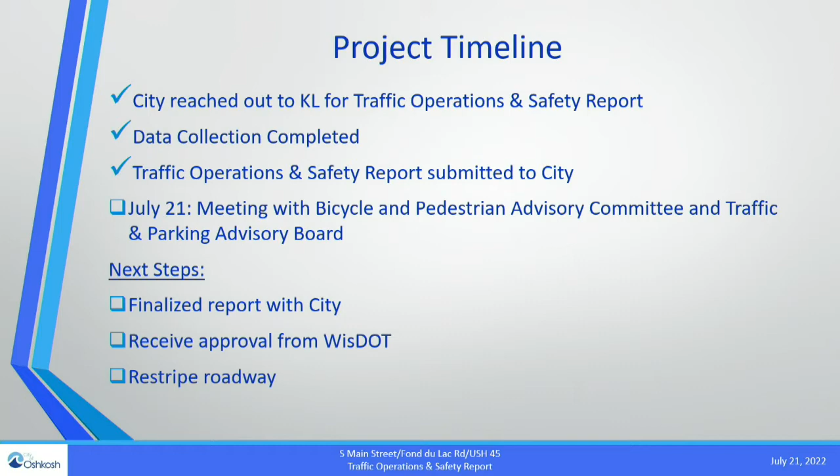As Jim mentioned, this is connecting highways, so it's a city street, but they have a level of jurisdiction because it's Highway 45. With their blessing, we're anticipating they'll be favorable. They did approve something very similar just to the north. And this type of roadway improvement is something that DOT does frequently throughout the state. So their approval gives you the opportunity to then restripe the roadway as this report suggests, or in some other variation of it, but essentially a road diet, taking it from 4 to 2 lanes with turn lanes.

So I'll be brief, a bit more on the background of the study we did. It's a traffic and safety study, so we look at both how well traffic flows, but also the safety characteristics, how things work now versus how these changes might affect that. We're looking at getting traffic counts, turning movements at intersections, overall traffic flow during the day, and then translating that into different ways to stripe the roadway, different lane configurations,

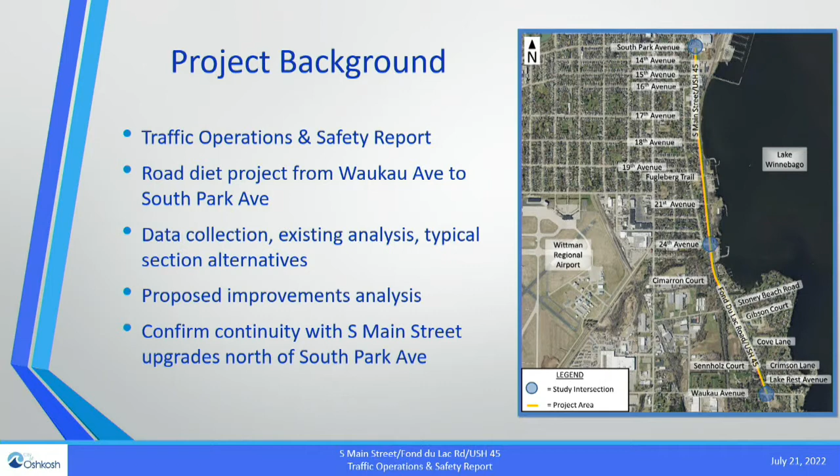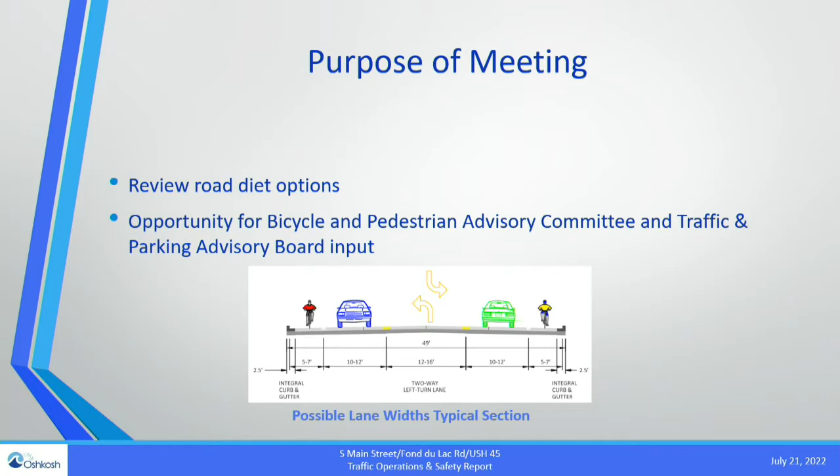looking at it from a continuity standpoint too, because the road to the south is a rural 2-lane section, then it transitions into the most recently converted section to the north. It's got some turn lanes. We're looking at a little bit different cross section in this piece, but understanding the continuity of the whole section of Main Street in this area. So again, the purpose of the meeting is to review the road diet options and performance metrics that our study found, and really looking for input and questions from this group.

So with that, Jamie, take us through the rest of the presentation. And again, if there's questions, please feel free to shout those out. We'll do our best to answer those as we go. Just real quick, to clarify, the scope is only between Waukau and South Park, not coming up to the river? Correct. That's correct. Yeah, we restriped that with the project last year. We restriped from 8th to South Park, so that part's already done with 1 lane in each direction.

It's a little different in that section because the goal, and Mark can jump in as well, the goal for that section was to add parking for the Sawdust District. Yeah, Sawdust District. If you recall, in the Sawdust District plan, we had the current roadway configuration, the intermediate plan of getting parking added to help businesses, and the long-range plan of that section being completely reconstructed. In the 28 to 30 range, we're using the connecting highway funds; I believe James submitted the application and got approved. Now we just find out where we end up in the funding for that. So that section, we already did the restriping, added parking on site, one travel lane in each direction.

And then ultimately, when we achieve the wider right-of-way in 28 to 30, it'll be completely rebuilt, more similar to what you see in front of the arena. This request that came in was specific to the southern part. Okay. And KL had to do a little bit of work with us on the restriping of the northern section because we had to do some light timings and stuff for WisDOT, all because of the connecting highway.

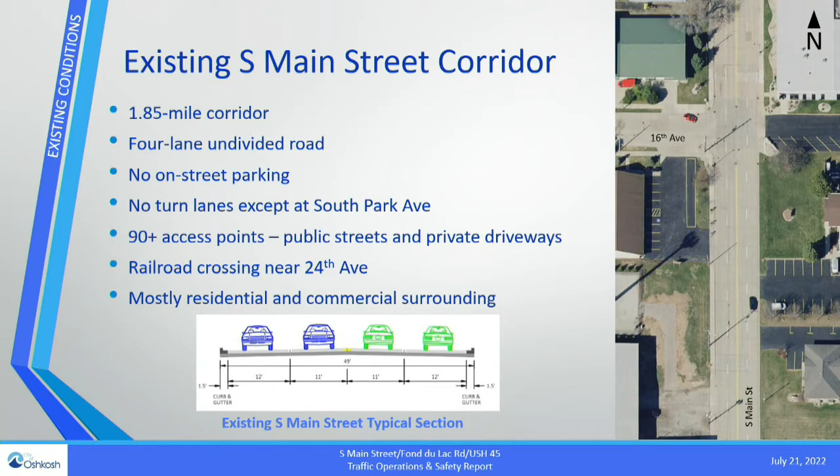So the first thing we did was we collected traffic counts in February of this past year. We focused specifically on the morning and afternoon peak periods during the weekdays, and we looked at our existing 2022, and then we looked at 20 years in the future with the forecasted volumes that WisDOT provided to us. We wanted to make sure that whatever we're recommending will work in the future, not just for right now. And the forecast estimated kind of minimal growth since this area is pretty built out already.

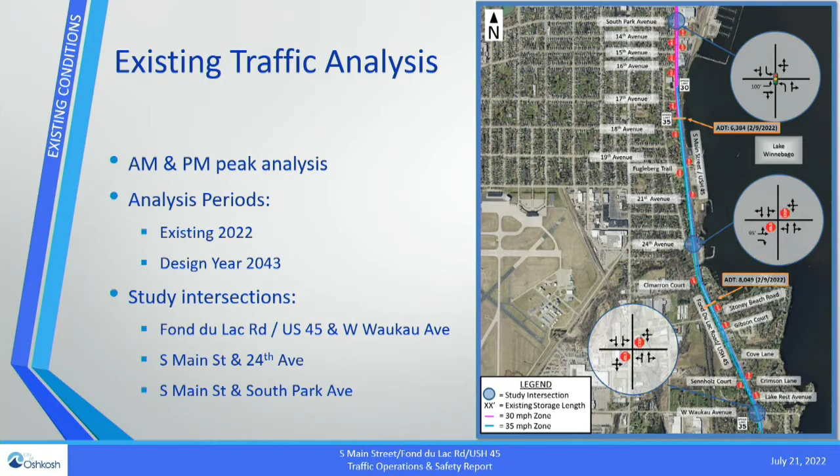We kind of zoned in on 3 main study intersections with Waukau Avenue to the south, 24th Avenue a little bit to the north, and then all the way up at South Park Avenue. And these 3 intersections just had a little bit more traffic volumes. They're more connected to the other main streets that go through the city. So we identified those as being a little bit more, we wanted to focus in on them a little bit more, right?

After that, we looked at our existing crashes. We pulled crashes from WisDOT from 2016 to 2020, as that was the most recent completed year that was available. And there were 58 reported crashes in that 5-year span. Of those 58, we found that 39% of the crashes were angle crashes, and they're mostly from cars turning from the minor street out into South Main Street and crashing into somebody on South Main Street. So that is one of the main problems with having a 4-lane undivided, is making sure that vehicles are clear in all 4 lanes.

We also found that 24% of the crashes were rear-end crashes at intersections, and with the lack of left turn lanes, we found that if somebody's slowing down in the left lane to turn left, if there's somebody who's distracted or moving a little bit too fast, then that can cause a rear end. We also found that 37% of all of the crashes had injuries, so they ranged from very minor injuries to a little bit more severe, but they're all definitely something to take into account.

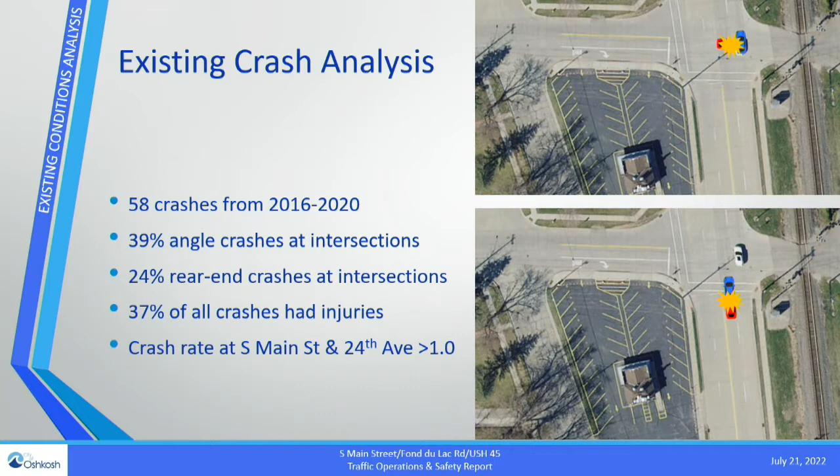And then we calculated the crash rate at South Main Street and 24th Avenue, and we found that the crash rate was greater than one crash per million entering vehicles, correct? And that just sets off a little bit of a red flag to us and WisDOT, so we wanted to make sure that we address that and some of our safety concerns that we've heard from before.

So we analyzed the whole corridor using some software and observations, and we found that South Main Street is operating well under our capacity limits. The average daily traffic is about 8,000 vehicles per day, which is well within the bounds of a 4-lane highway, even a 2-lane roadway. That's pretty well under capacity for that. So we're operating at a level of service A, we found, currently and in our 20-year look ahead, and that is extremely acceptable, almost free flow down South Main Street.

Oh, that went forward. Sorry.

And then we found that all of our side streets were operating at a level of service C or better, which is tolerable, not extremely long delays or queues that we found.

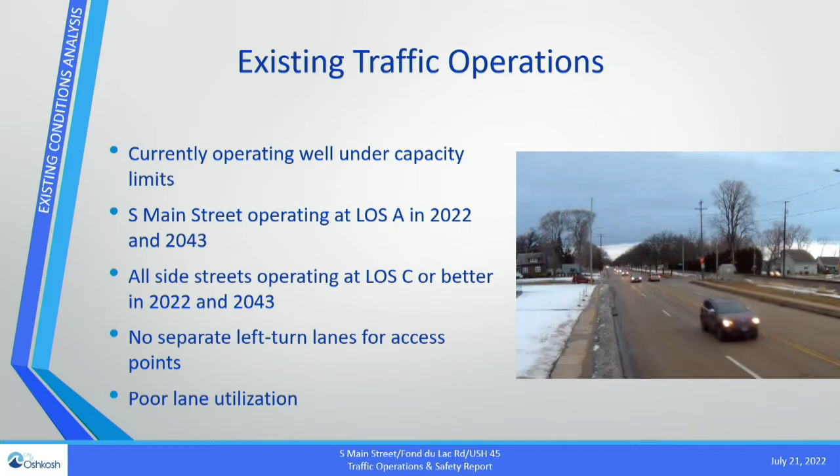We did mention before, so there's no separate left turn lanes for our access points going onto South Main Street or on South Main Street, which can lead to some pretty poor lane utilization with cars that are turning left or right. So you can see in this screenshot on the screen that the left lane moving southbound, pretty much all of the vehicles traveling south are in that left lane. So it did kind of hop between the right lane and the left lane that we noticed, but in general, most of the vehicles are in one lane or the other at the same time.

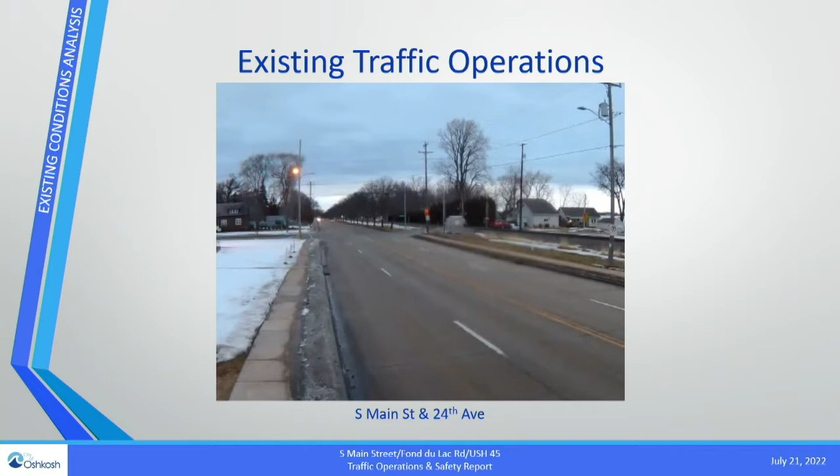So after we looked at all of that, we went back to what the city wanted for their goals and objectives of this corridor, and we wanted to make sure that we were maintaining or increasing the efficiency of movement through South Main Street, through that whole corridor. We wanted to maintain or increase our operations through the side roads as well. We obviously want to increase safety as much as we can on South Main Street and our side streets.

Maintaining access to all of those 90+ access points was also a big factor in our decisions, and we wanted to increase our multimodal facilities, so accommodating bicycles, pedestrians a little bit better, and we wanted to do this all within our existing curb and gutter. So we're not talking about reconstructing, tearing up the road, mostly just repainting that corridor.

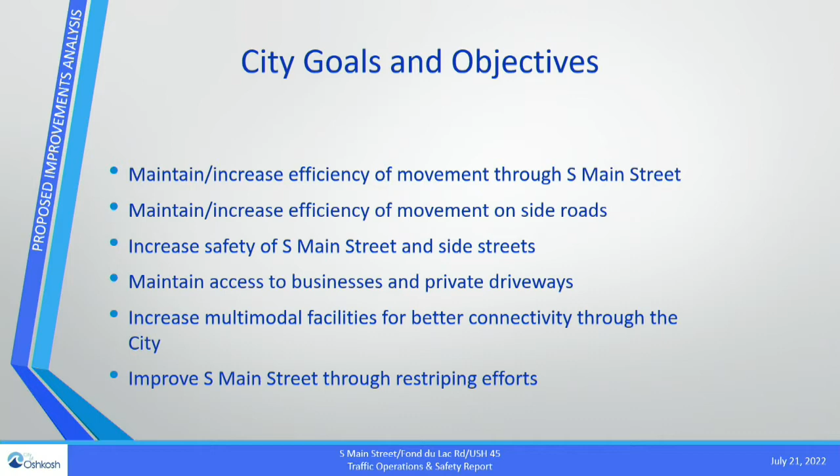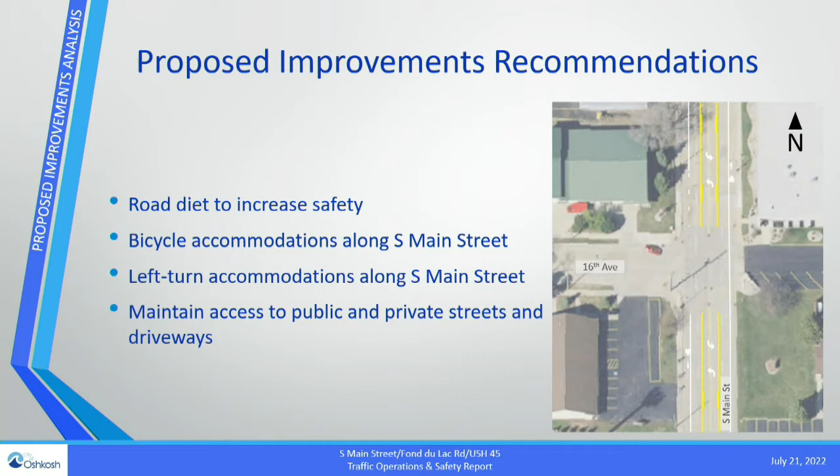So with all of those goals and objectives in mind, we came up with some recommendations for what we can do with the corridor. We looked at specifically allowing for left turns off of South Main Street a little bit safer and a little bit easier. And we looked at including some bicycle accommodations along South Main Street, and again, maintaining access to all of our access points. Which leads us to a road diet, and this can increase safety, and it essentially narrows the roadway down from 2 travel lanes down to 1, and introduces that 2-way left turn lane or left turn lanes, and then that gives room for bicycle lanes as well on the street.

So we looked at exclusive left turn lanes for all of our access points, because this is a little bit more rural than that segment to the north of South Park. We decided that maybe a 2-way left turn lane would be more efficient to help with all of those smaller access points that people don't turn into and out of as often, but still need that extra space to be able to turn into and out of.

So incorporating this would involve reducing the number of through lanes from 2 to 1 in each direction, and this 2-way left turn lane or TWLTL would allow for a continuous left turn lane so that you can turn into all of those smaller access points and side streets along the whole corridor. One of the main benefits of this is that it reduces the number of conflict points we have, as cars that are turning from the side streets only have 3 lanes of traffic to travel across instead of 4 now, which can help reduce those angle crashes.

And then we also looked closer to 24th Avenue, where we had a little bit of a higher crash rate, and we would recommend that we provide exclusive left turn lanes there. So converting that TWLTL into exclusive left turn lanes just at that intersection, and then expanding it back to a TWLTL on either side.

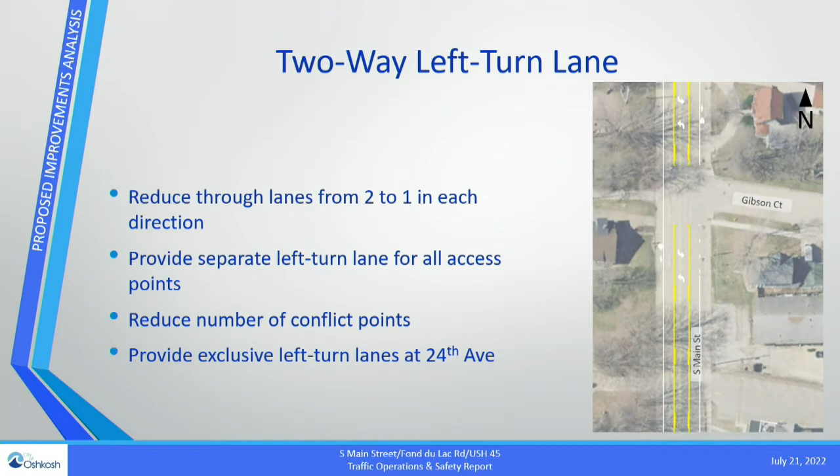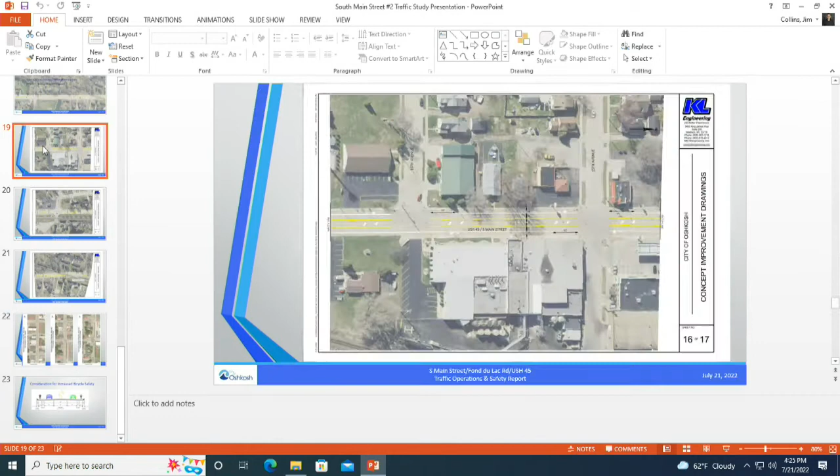I'm sorry, is there an image to show, if you go back, that transition from the dedicated or exclusive left turn lanes to the TWLTL? Yeah, I actually have that in here. I think I did put that in later in the slideshow too. Oh, okay. Should I go to it real quick? Yeah, if you want to jump to that. Also, if you have one of these packets, that shows that intersection as well. The reason I ask, Jim, as you know, over on Oshkosh Avenue, it kind of has that dedicated left, then straight, then dedicated left.

There's a lot of confusion over there. Is that what they're describing here? Which area? Over on Oshkosh Avenue, right around Arboretum and Algoma, where for a few hundred feet there's dedicated right, and then it goes to straight only, then it's dedicated left and straight. Do you know what I'm saying? Yeah, that kind of leapfrog. No, that wouldn't be. Okay. To be different than that.

Basically, here they're only talking about the dedicated left turn lanes at the intersection. So if you look here, this is 24th Avenue, north is facing to the right. So we would have a two-way left turn lane up until we're within 100, 200 feet of the intersection. And then we would recommend adding a double yellow line here to close off the twiddle, and then you would have that left turn lane forming, and then cars can turn into and out of. And it would be very similar just to the south of that. So this is more like Murdock, or even like Jackson.

To that point that the mayor makes, I'm looking at the house that's on the west of that intersection, on what would be the north. This one right here? That one right there. Is that person not then unable to get to their home from the south? Well, with the turn lane length, that's not set in stone or anything. There's some flexibility. The important thing in our minds was this is a more prominent intersection. The turning movements are more significant. Well, I get it, but I'm just trying to play devil's advocate here, because if that was my house, I'd be a little less than happy.

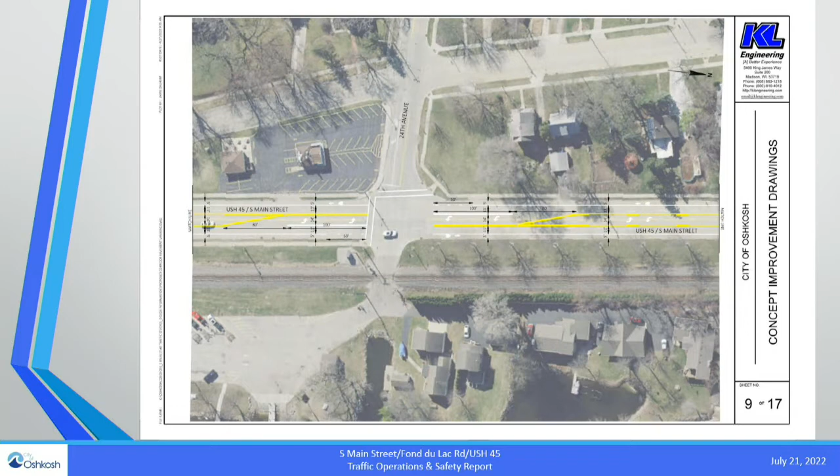Can you zoom in on that? Does that drive go between the two houses? Like, is that a garage there coming off South Main? Like, if we go up now to the west here? No, it doesn't go all the way through, so that's their only driveway access, is that right, to that second house there? Yeah, it would appear so, I believe. It looks like that, yeah.

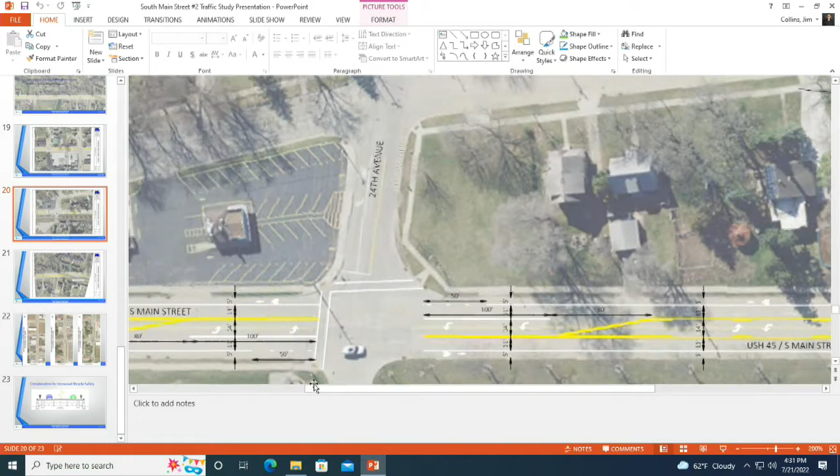All right, thank you. I guess, while we're talking, if you pan to the left a little bit, Jim, the commercial property, that's the drive-in. Their driveway is probably in a location where, as cars stack up, they may restrict that to more of a right turns only type of driveway. They do have access off of 24th though as well. This is also the intersection that had the concerning crash history, right? Yes. Correct.

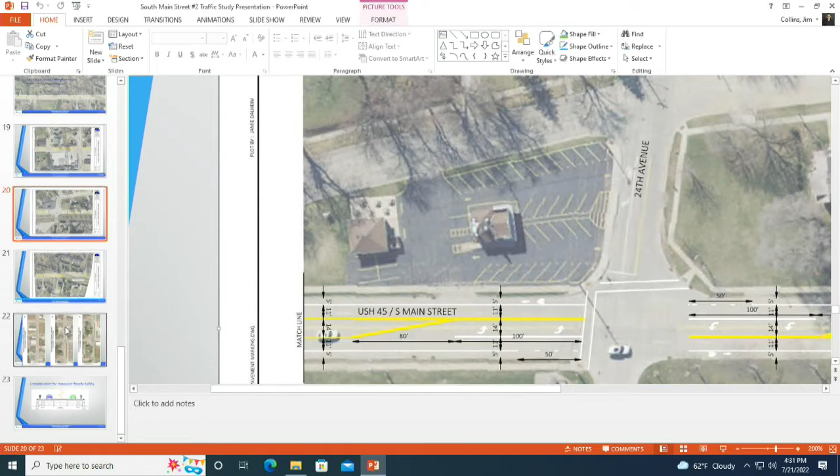So these two screenshots are what we found based on WisDOT guidelines and then what we ultimately would recommend for our typical section. That top screenshot is a typical section with acceptable lane widths. So we can have a bike lane of anywhere between 4 and 7 feet, a travel lane between 10 and 12, and the TWLTL can be between 12 and 16 feet.

And just playing around with those widths and maintaining continuity with the section to the north and typical widths that we see, we are recommending that bottom screenshot with 5-foot bike lane width, 11-foot travel lanes, which is what we have to the north there, and a 14-foot TWLTL. And that'll fit perfectly within that curb and gutter line. 14 feet is pretty typical, 5 feet bike lane is pretty typical.

Maybe just briefly, we also talked to Jim and considered buffered bike lanes. I don't know if that's a familiar topic, but basically a narrower bike lane and potentially a narrower travel lane, making up for that space with a double white line. We stepped away from that with this being fairly conventional and effective, in our opinion.

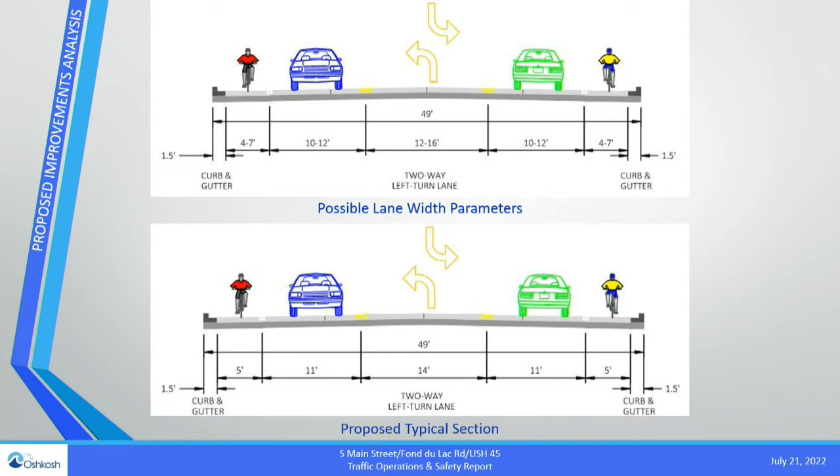And what would the sidewalk allowance be then in that scenario? So we weren't recommending to change anything with the sidewalk. Throughout the corridor, the sidewalk is butted up right against that curb sometimes, and sometimes there is some terrace. But I believe the sidewalk is acceptable with a 5 or 6 foot width. And really no changes to crosswalks; if they're in locations now, we didn't see any need to change those or move them to the opposite side of intersections. They felt pretty adequate with the proposed typical section.

It'll be easier for pedestrians to cross because you don't have 4 lanes of traffic to monitor. It's really only 2. Left turns are a little easier to understand, what those drivers are doing in that center lane. What is the current sidewalk width down there? I'm guessing it's probably 5. Yeah, I think it goes between 5 and 6, depending on whether there's the terrace. Like, it's about a 5-foot walk.

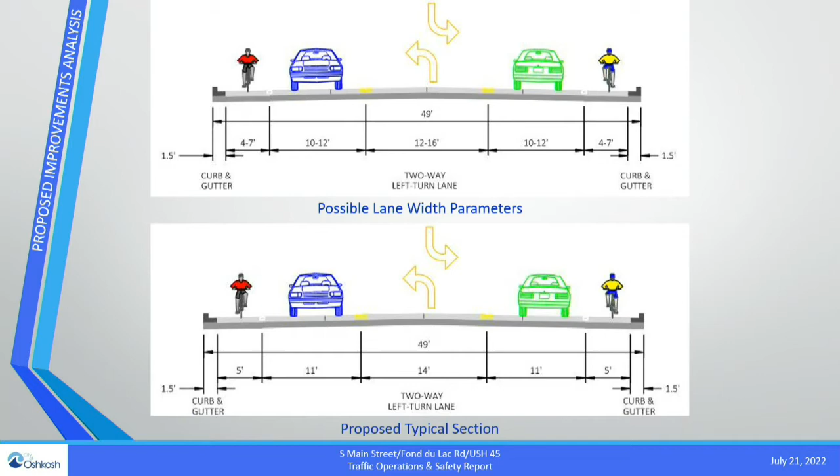So after we came up with our recommendation for a typical section, we ran the same kind of analysis through our software and the history of this type of typical section. And so essentially the big benefit of having a TWLTL is that we're removing our left turns from the through-moving traffic, which you can see with those purple arrows. This allows cars to move out of the through lane, slow down, and then make their turns safely without having to worry as much about somebody not slowing down behind them and causing a rear-end crash.

For pedestrians, having a TWLTL would remove that multi-lane threat condition, which you can see on the little bottom graphic there. With two travel lanes, sometimes one lane of traffic will stop for a pedestrian and the other lane may not, and essentially removing one of those lanes from each direction of traffic would remove that threat and increase safety for pedestrians crossing. It also allows pedestrians to sit in that TWLTL area so they can make more of a two-stage crossing, so they don't have to find a larger gap to cross the street. Reducing the lanes also, like I said, will allow for that bike lane to be added on the sides of the street.

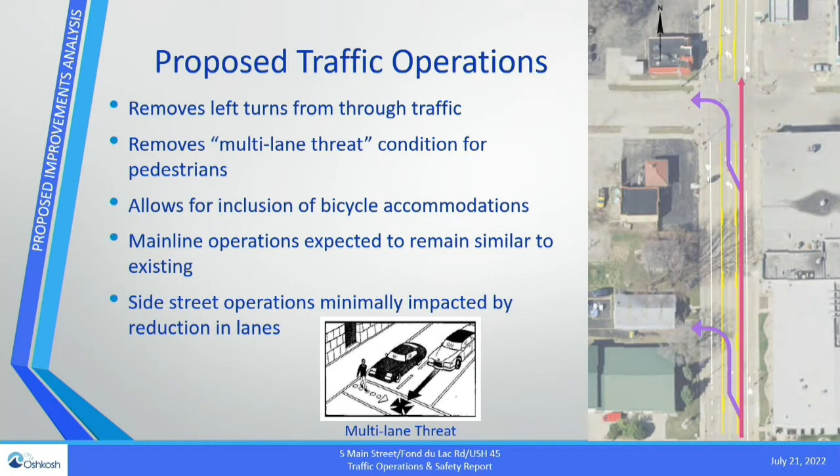So then we also performed a predictive crash modeling analysis with some software that WisDOT uses in their more formal reports. And our results indicated that going from our existing typical section to what we're recommending is expected to decrease our crashes overall by 16%, which is pretty significant. And like we said, there are other safety benefits of having a TWLTL, removing those left-turn vehicles. Hopefully we will see easier through and turning movements from the side roads because we only have one lane to navigate rather than making sure there's a gap in all four lanes of traffic. We're adding that dedicated space for bicycle lanes and reducing our number of lanes for pedestrians, so hopefully that should make it a little bit easier for pedestrians to cross the street there.

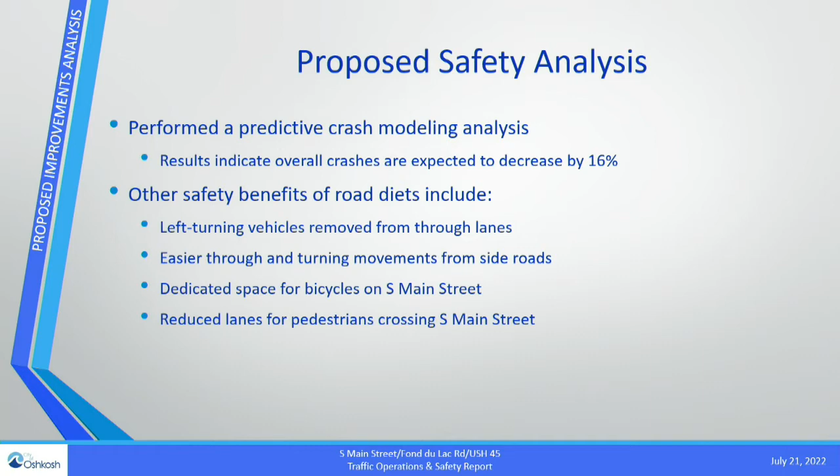I think it's fair to say this 16% reduction is a methodology that the DOT uses. It kind of ignores all the driveways; it's more just looking at the road feature itself. So I think our judgment is if you give credit to the amount of driveways and the amount of turns that happen in mid-block segments, 16 is the low end of potential crash reduction. It's not unlikely to be greater than that. I think it's fair to say that it's probably going to be at least that, if not greater.

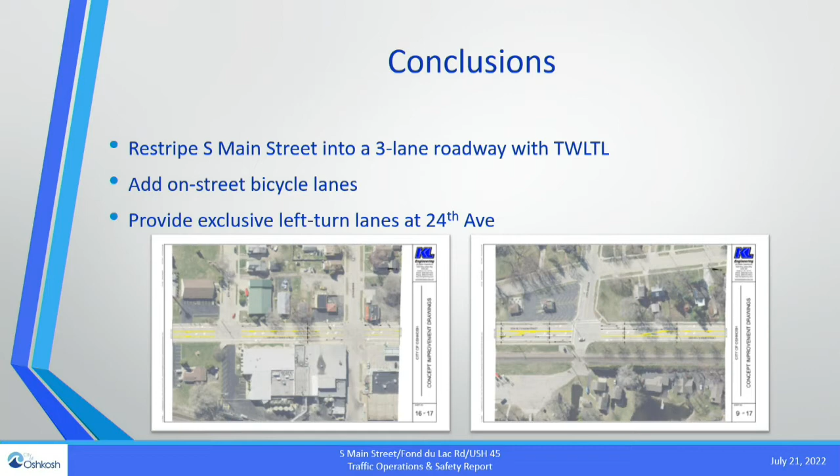So overall, we're essentially recommending that South Main Street be restriped into a three-lane roadway with a TWLTL in the center, adding those on-street bicycle lanes and providing exclusive left-turn lanes at 24th Avenue to better combat the higher crash rate and slightly higher volumes turning on 24th.

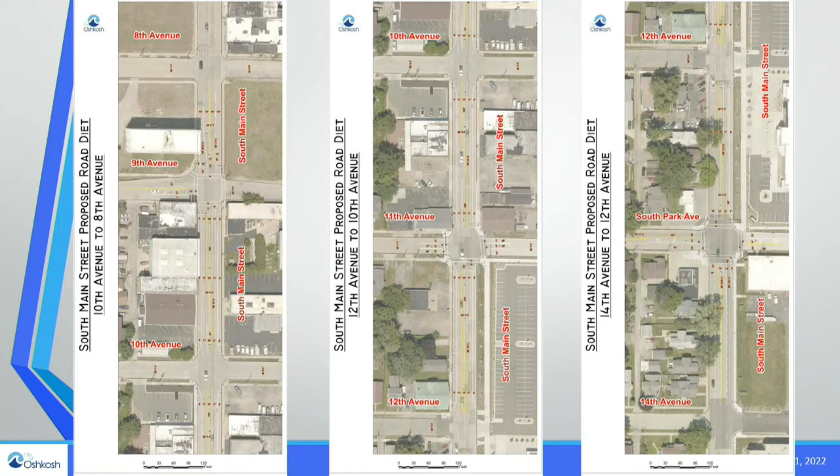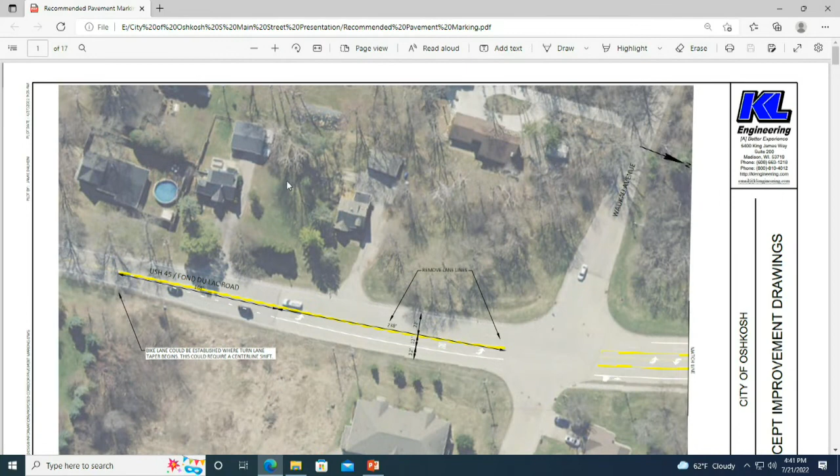So if you flip actually to the last page, I believe, in those concept drawings, we should have a little bit. It's on that jump drive, can you pull that up? Yeah, I can. It might be useful, we can kind of take you from south to north and just give you a visual of those striping plans. That's what the long plots you have in front of you are.

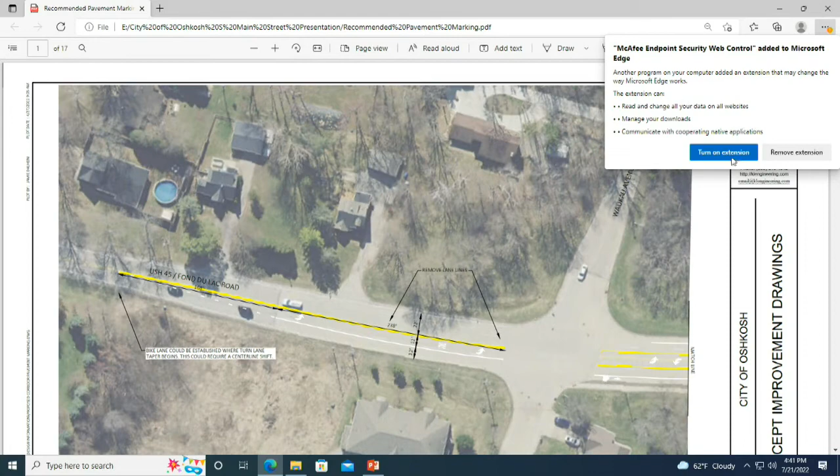Main Street's not as wide there as it is further south, is it? I don't know that the width varies necessarily. I don't think it does. It just seems like it's narrower, you know, as the more city portion of it. Yeah. Without checking, I'm not positive, but I don't think it does. I mean, it's so wide open further south that it's like a freeway almost.

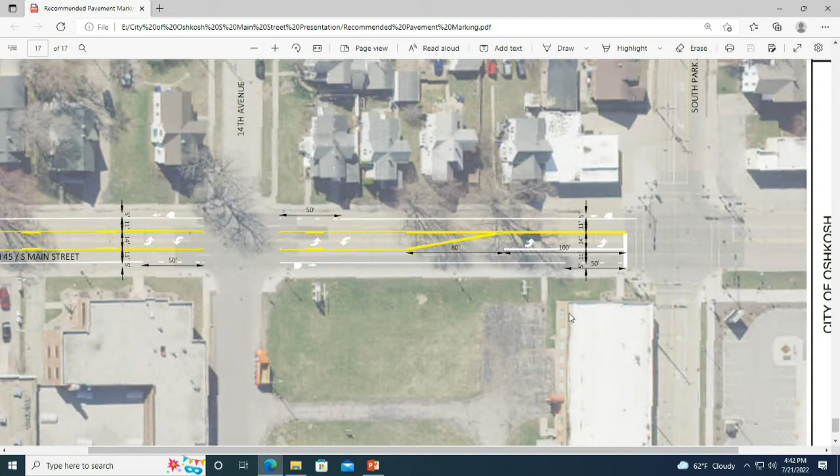And Jamie, maybe kind of step back at the beginning. There's a couple elements of this corridor that were unique when we did the lane layouts. On the south end, as you come from the south, it's kind of a rural 2-lane highway, so right now it kind of flares out. Our suggestion is, since you have the space there, as you go northbound, to create a left turn lane here. That space already exists. This would have a dedicated left unlike today, and it pushes traffic in the through lane to the far right side, and you continue on in that position.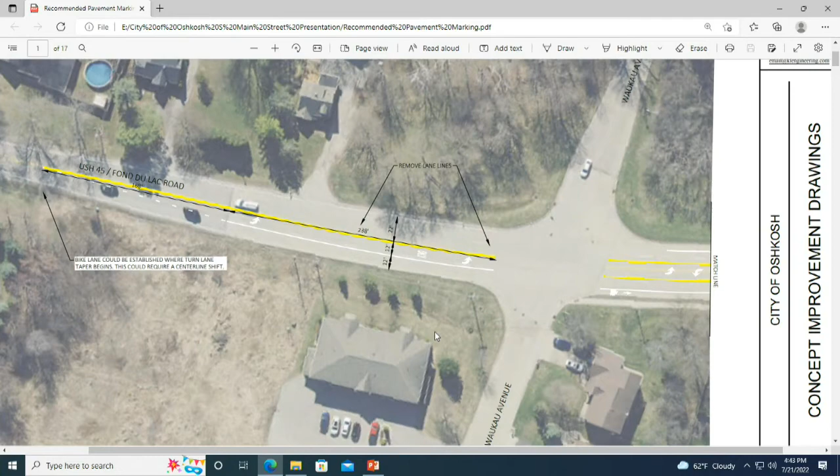And then southbound, basically, that lane terminates. What we're looking at is really just scrubbing the couple lane dashes that are south of Waukau, so there's no 2-lane southbound segment. It'll go straight through as a 1-lane southbound movement. Should I show the railroad crossing too? Yeah, I was thinking if you skip ahead, it's fairly uniform up until a point.

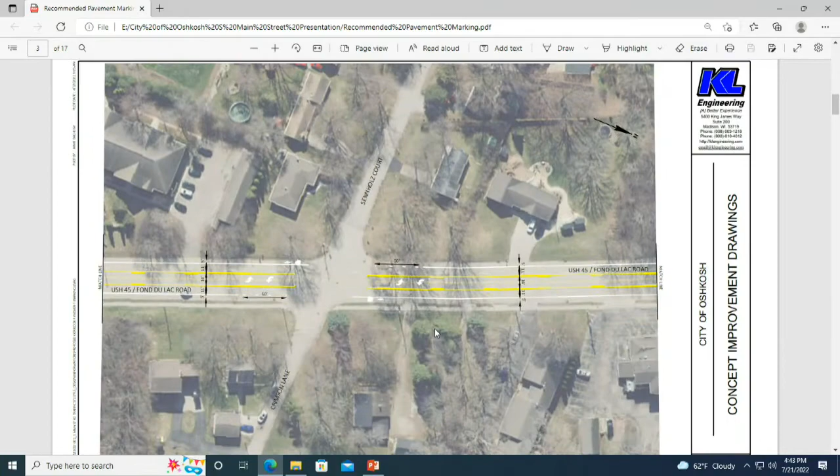Yeah, so we're recommending pretty much a twiddle the whole way, and then once we get close to that railroad crossing, there are WisDOT guidelines that prevent a twiddle going over a railroad crossing. The recommendation, I believe, is between 100 and 200 feet, you cannot have a twiddle. So we are just recommending adding some cross hatching to shut that twiddle down. You can't really turn in this area as much either. So just closing that down, but maintaining that space so that we still only have one travel lane. And then once we're outside of those limits, we would just open the lane back up to allow turns again.

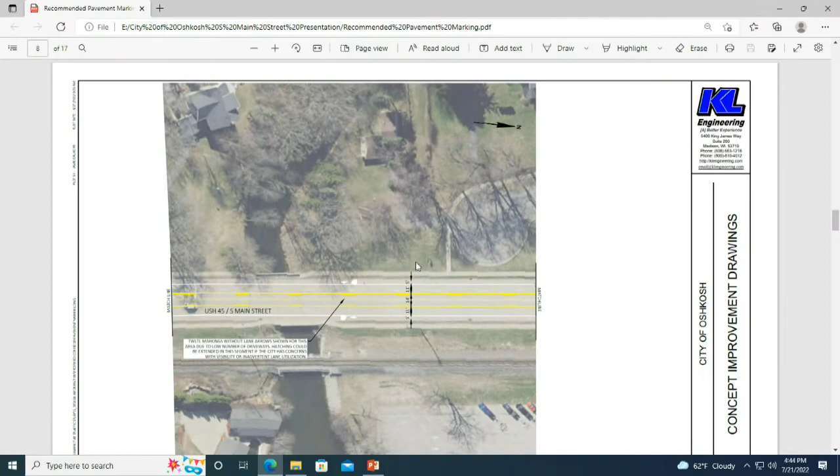Before you move on, what's the distance between the tracks and Cimarron Court? So I have that measured. Because again, I'm going to make the same argument I made before, which is I'd be less than happy if I couldn't get to my house. So from here, it's about 240 feet. So with a little bit more refinement in planning, we could cut that off; the recommendation is 100 to 200 feet. So if there's a lot of people who want to turn onto Cimarron Court, we could push that closer to the lower bound, which would still be acceptable. Anybody know how many residential units are in Cimarron Court?

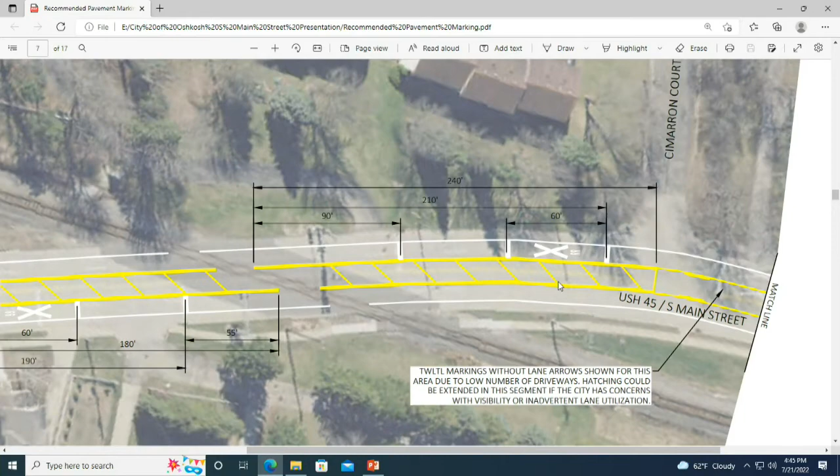I'm guessing it's 50 to 60, just best guess. What's that, Courtney? I agree with you. It should be pushed in farther. Yeah. There are a fair amount of units back in there. And I think the same applies on the opposite side, on the other side of the tracks.

There are some driveways. People will, in my opinion, probably just ignore the hatching and turn left. And if that's an issue, I think it's more of an enforcement situation. But it will be striped in a fashion that would technically say that's prohibited. Can you zoom in on the lower measurements? Down here. Yes. So we have it measured at 190 feet for the stop bar. And again, between 100 and 200 feet is acceptable to WisDOT.

Can you do it at 100? So if they say between 100 and 200, could we make it as small as possible, theoretically? I think the judgment could be made. If it's a high volume street, the traffic engineer would say, we'll make that 200 because it's more significant. If it's somebody's driveway, then the low end is a reasonable judgment to make. So that's kind of the idea behind a lot of those ranges, whether it's a more or less significant movement that you're trying to provide space for.

So we already know people are going to be turning on it, so we're going to make it hatched or cut it short so that you're at least included. Exactly, that's what I'm thinking about. The track here is skewed as well, so if you measure from one side versus the other, that 100 to 200 is up to 25 feet different just because of that angle. So there's some room for judgment there.

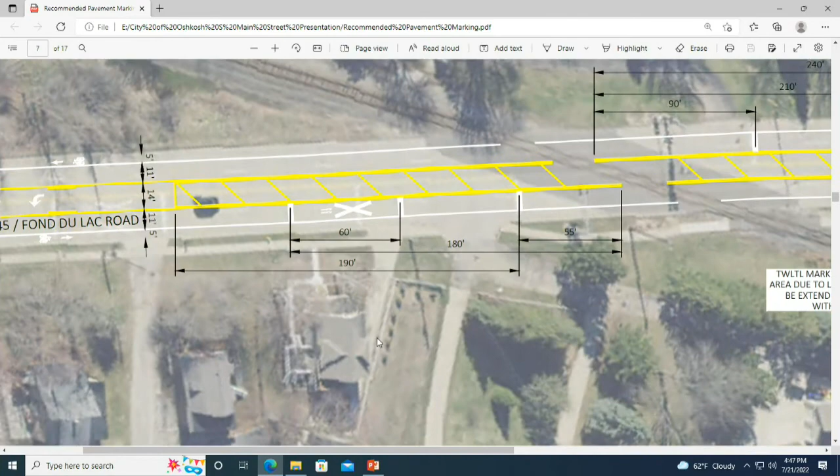Which is a nice segue to one of my other questions. Again, I'm not as well versed with where all the bike lanes are in town, Jim, but do we actually have another bike lane in town that goes across a set of tracks at something other than a 90-degree angle? I don't think we do. All the east-wests go straight across at a 90-degree angle. Can you think of any train tracks that are not 90 degrees that bike lanes go through? Harrison Street? There's no bike lanes there. No.

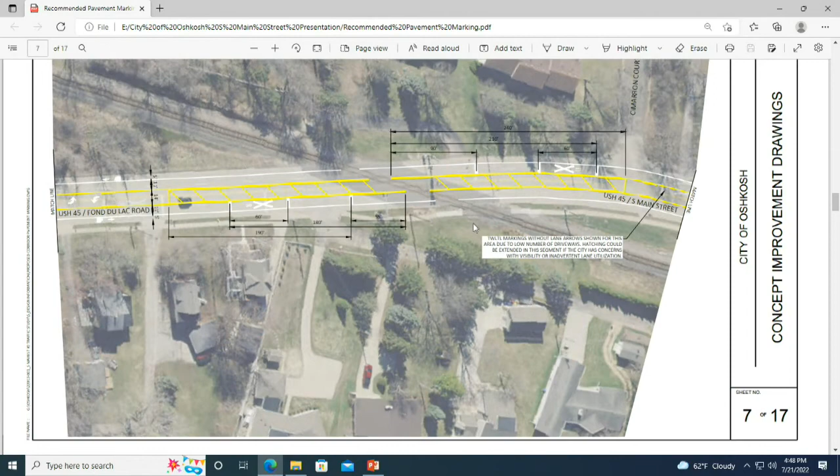The reason I ask, obviously, is it's going to take a little more room for a bike to get over those tracks because you can't go across at anything other than 90 without wiping out. Right. So it looks like there is some room here. What we could do is, with roundabouts, we'll actually push those bike lanes off of the roadway so that they aren't going through the roundabout, they're going around it. So we could potentially have bikes follow off this sidewalk here and maybe extend it so that they're crossing more perpendicular and then they hop back on the road here. I think that's a possibility.

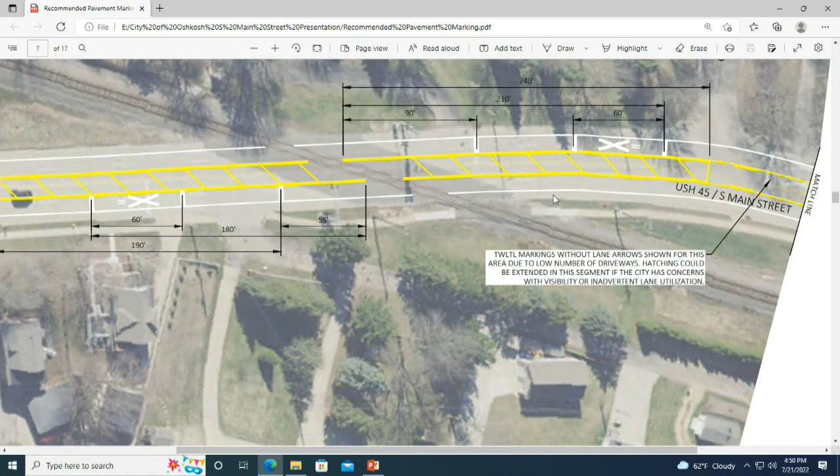Well, the same would be true if somebody was using a motorized wheelchair, right? Yeah. My mom's been in them. She's gotten stuck on the tracks because of those weird angle things. Exactly. And a lot of that has to do with the condition of the track crossing. Some are older, and those gaps can vary as those crossings degrade. And there are features on sidewalks where those gaps are narrower because they know pedestrians, cyclists and wheelchairs are going to traverse those. Especially with those smaller caster wheels, if it's not a 90-degree clunk.

It's worth stating, though, that any of this redesign is going to be safer than what exists currently. So that's the other point here. No matter how the turns are going to be made, no matter how engineering figures out crossing the tracks, all of these would be safer than what's there now. I would definitely suggest that's a fair statement.

I know some of the public wants to speak, and I don't want to cut anybody off. If you guys have more discussion, we can do that after, but I want to make sure they get their chance. So we can allow that? Yes. Okay. There's one other aspect, maybe if Jamie can advance the slide, just to give some context.

So these two-way left turn lanes often have back-to-back arrows to alert drivers that you can turn in either direction using that lane. There's a good chunk of this where it's parallel to the tracks. These drawings show no arrows in this segment where there are no driveways on either side. That's somewhat optional. A lot of times agencies will just put them there regardless.

And then there are some sections where you can turn to the west but not to the east, and you could make the judgment to just put the arrow that points that direction, or put them both. There are rules of thumb that allow either way. So as you reference these drawings, there are some notes to that effect as well. I think that's the main points we had.

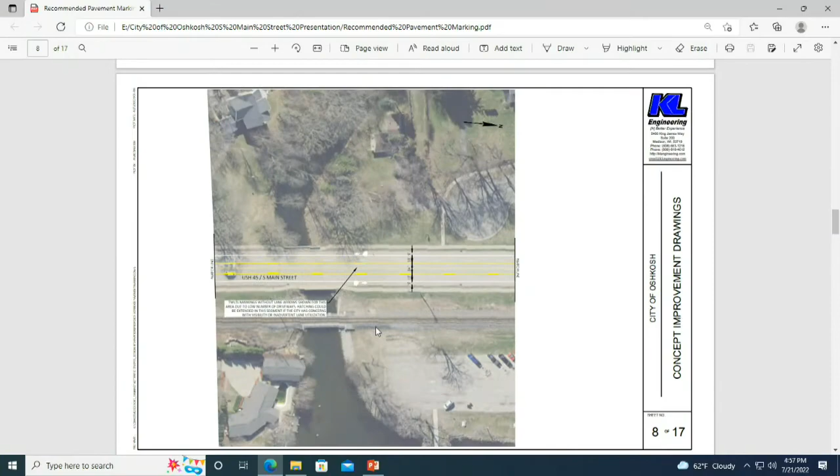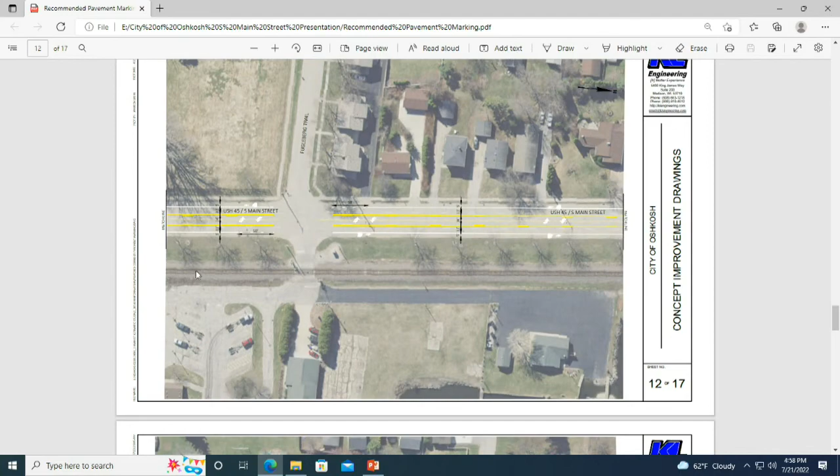No, well, I can answer that. Right now, we're just looking at this as a restriping project. But I know that, so this would be maintaining the curbs and gutters as they are, but then just restriping the road, similar to what we did on Jackson, Murdock, 9th. But yeah, if you want to look at the park area. So that would be the top left, basically.

Because I seem to recall a couple years ago being over there with the Parks Committee, and I was on my bike, and I think I was coming east off that sidewalk there, and since there's no sidewalk on the east side, I can't even remember why I was crossing, to be honest, but I just recall it being kind of treacherous. And so is that a potential bump out consideration, or do we know, Jim, in the CIP, if there's any anticipation of going into sidewalk on the east side?

I don't off the top of my head, but yeah, that's something we could look at. Obviously, that would be a more expensive project than restriping, but I'm not sure where sidewalks are. I'm not aware of it being in the immediate CIP. I know it's not in the next year or two. I don't know, Mark, if you have any thoughts or if you've had any conversations on that.

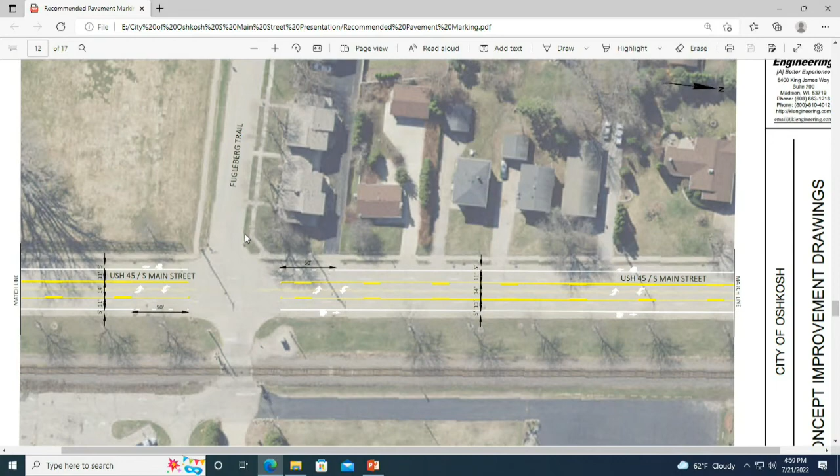I haven't. I'm not familiar with the CIP for sidewalk in that area at all. You can go back and look, but it's not ringing a bell as something I remember seeing in the CIP. And our CIP just went for 5 to 10 years. That's why I was asking. There might be something, but like I said, that's in the public works CIP. I'm only aware of the immediate, so.

Sure. Alexa, do we have anything in our bike and ped plan down in that area? I don't believe this is in the plan, but it is definitely the type of thing that we would put in our priority list. Mm-hmm. So yeah, we can keep it on the list or put it on the list.

What I'd like to see for the east side is, like how the Riverwalk is, have like a boardwalk along the lake. Like a nice wide boardwalk. I was at one of the visiting sessions, and I was talking to a guy who said he owns a lot of the property on the lake, and he was in favor of that too. Like he would certainly allow that on his property.

What section was that? Right along the lake shore, pretty much from, I would say, the Pioneer down to the 24th Street boat landing. It'd be nice because especially if you're driving in from the south, it's kind of wooded, and then all of a sudden, boom, it opens up, that nice big lake view. It's how they envisioned the Riverwalk many years ago. It'd be nice if we could have, like I said, a nice big boardwalk along the lake.